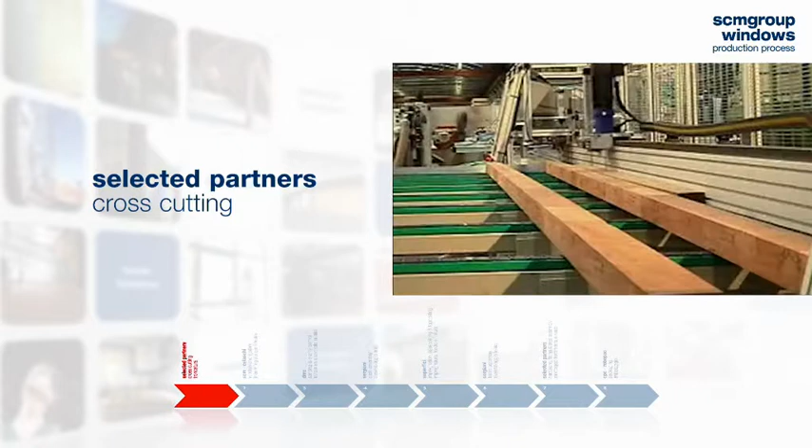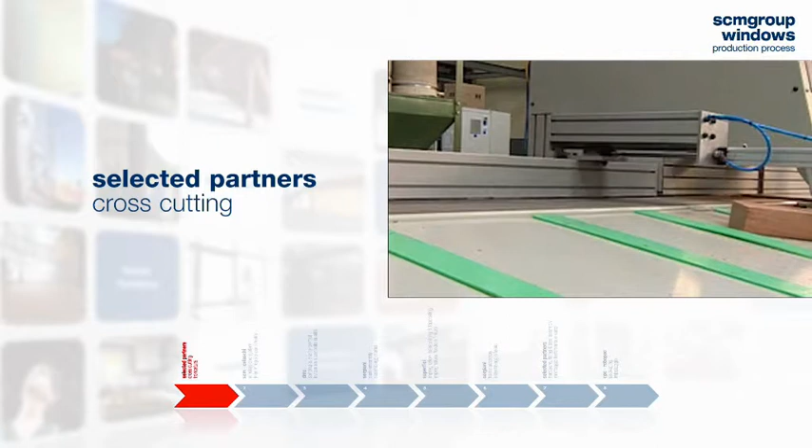Cross-cutting produces parts cut to the required lengths for sashes and frames. For solid wood, bar cutting may involve defect removal, and the cut is carried out according to a production list or with optimization of the bar to be cut. Cross-cutting is performed using selected partner technologies.

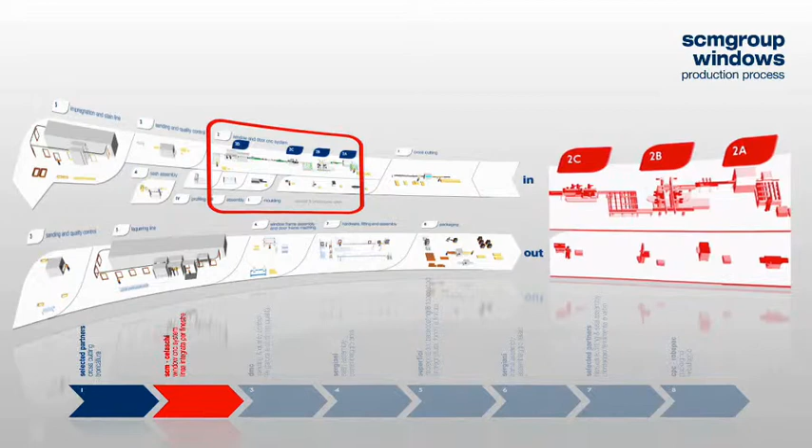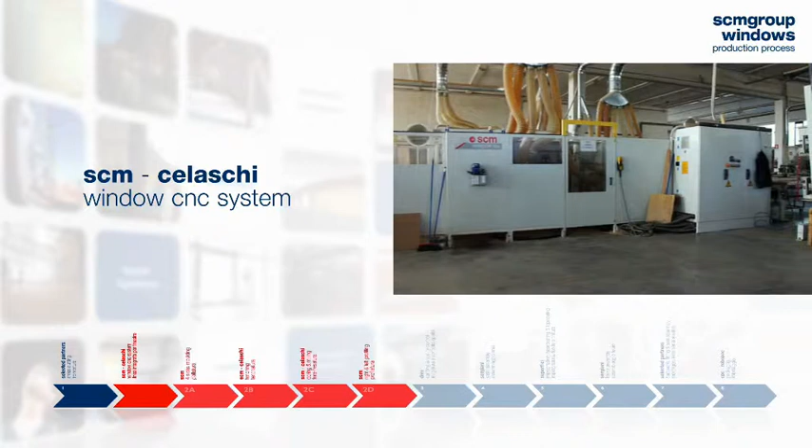All of the mechanical operations required to obtain the finished item are carried out using different types of window CNC systems, to satisfy all customers' production requirements.

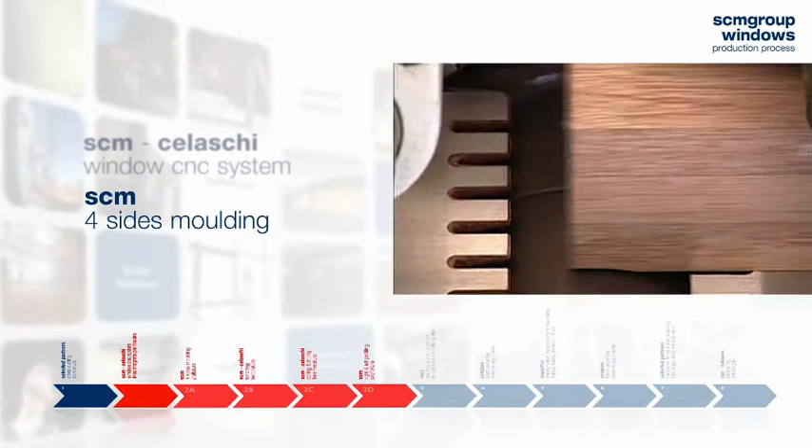During 4 sides molding, the geometry and quality of the parts are prepared for the subsequent processing. If necessary, glazing beads can be obtained when assembling glass on windows, or small profiles for other uses.

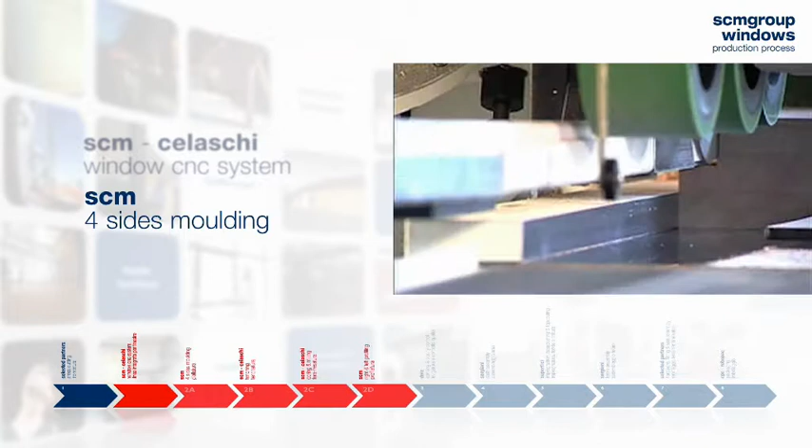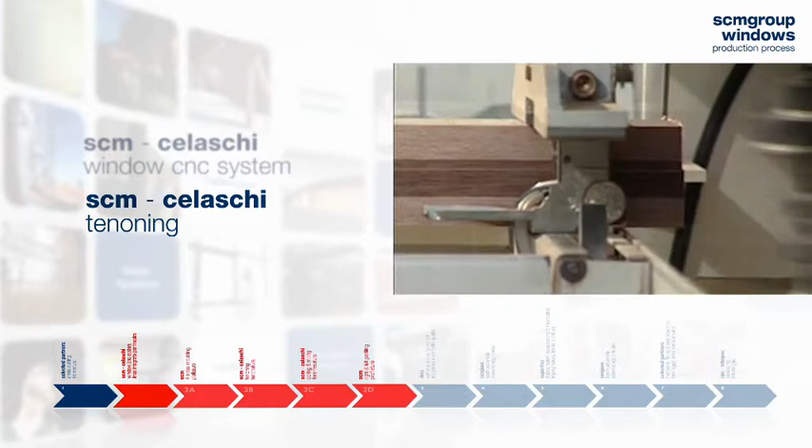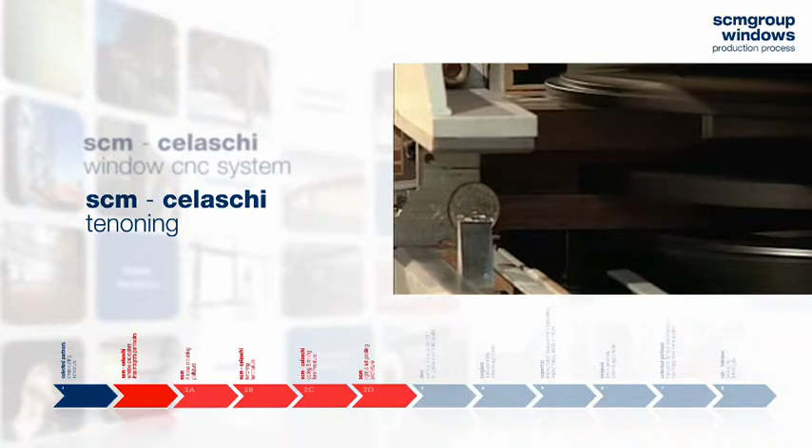During tenoning, the machine prepares the ends of the workpieces for joining or assembly in order to form a sash or a frame. The most common assembly systems are tenons, wooden dowels and mechanical joints.

During boring and milling, the machine heads make the cavities for fitting hardware, hinges and handles on the frame and the sash.

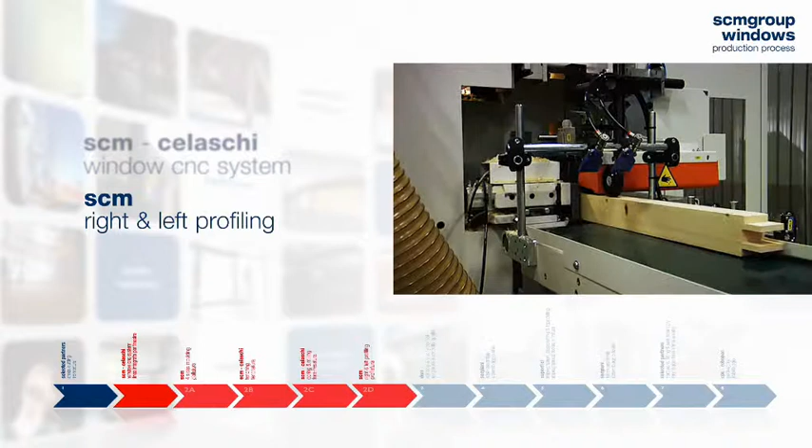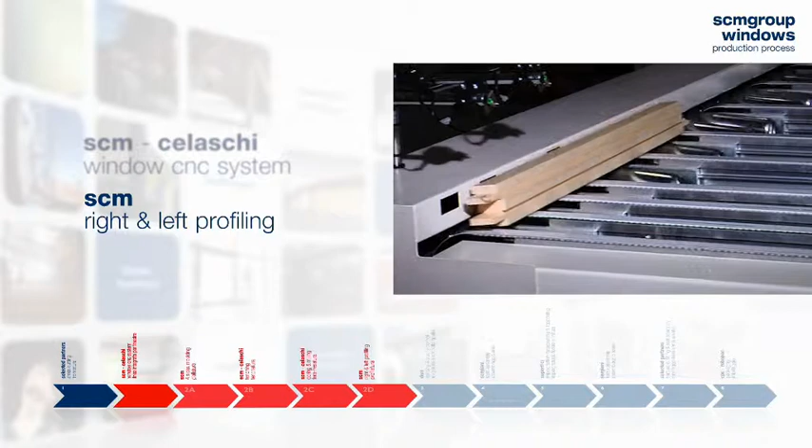During profiling, the longitudinal left and right sides are molded and, if necessary, grooves for seals or hardware are automatically made. All of the technologies for these 4 functions are designed and built by SCM and Celaschi.

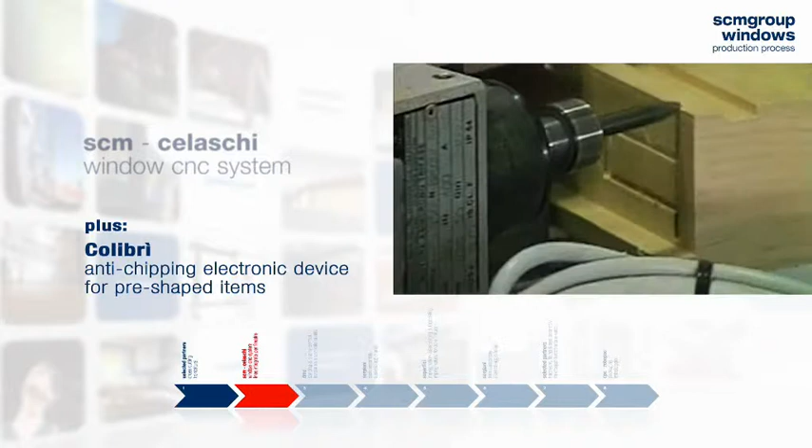The functions performed by the line are managed and coordinated by the line supervisor. Colibri is an anti-chipping electronic device for pre-shaped items. Items can be marked by ink or laser.

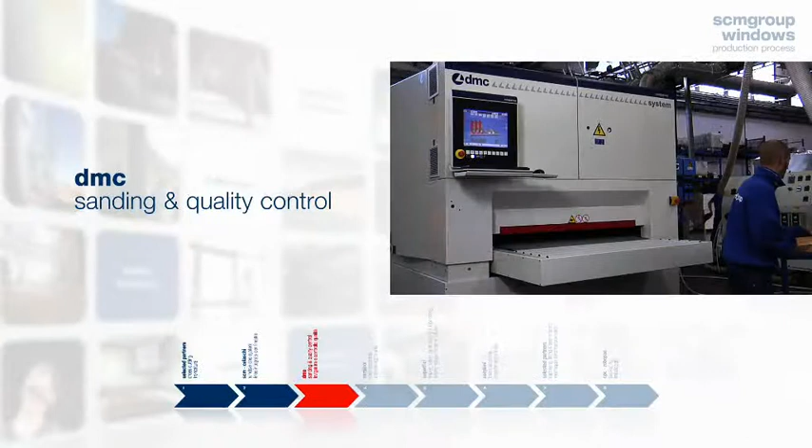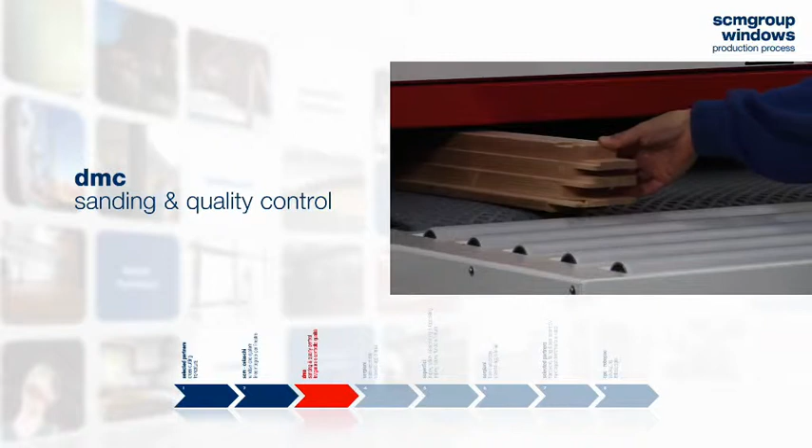Sanding prepares the sash and frame for the subsequent impregnation and coating, to improve the quality of the product by removing any defects caused by the previous processing, and above all to ensure that the coating agents penetrate best and deepest on sanded surfaces.

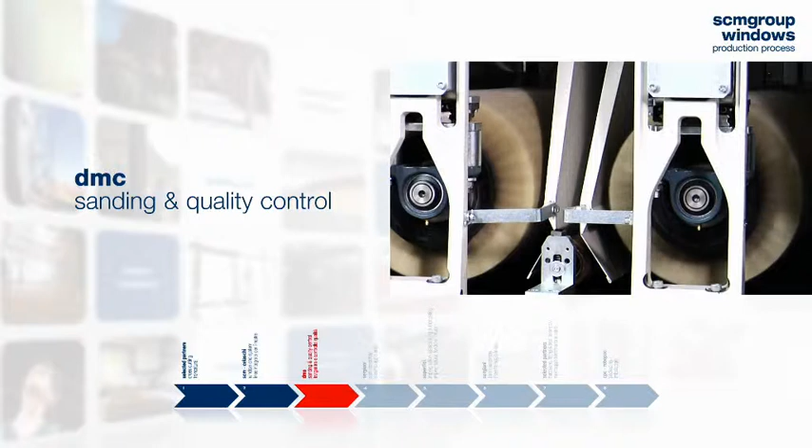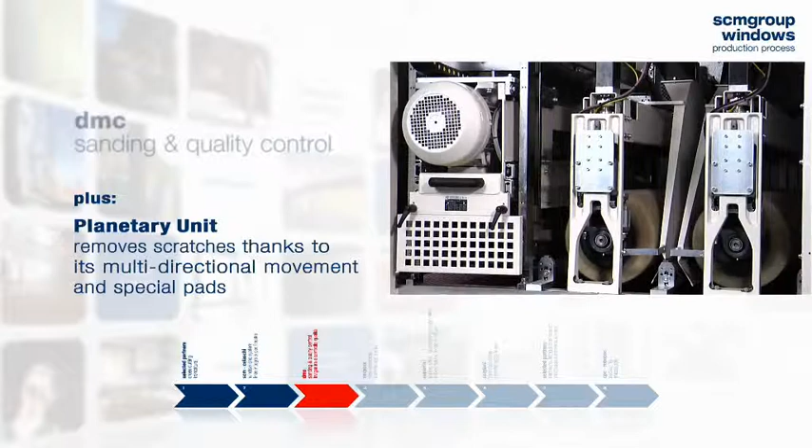The use of a planetary unit allows complete removal of the skin for excellent results. A second sanding step is carried out after impregnation of the sash and frame elements. Sanding is carried out using DMC technologies. The planetary unit removes scratches thanks to its multi-directional movement and special pads.

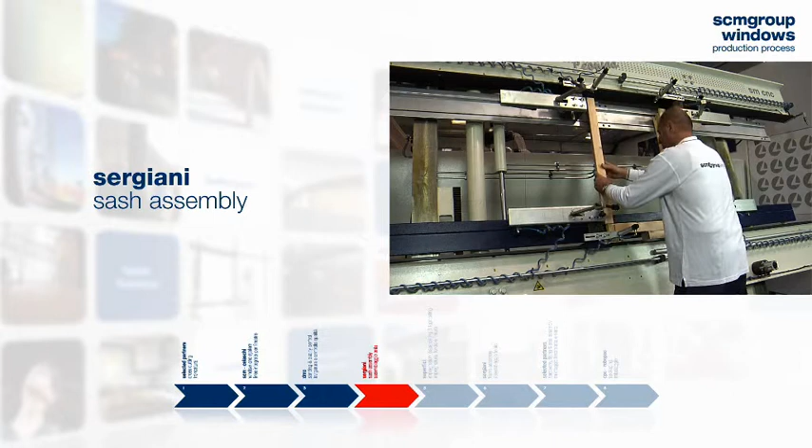During sash assembly, the CNC machine allows, after glue has been spread on the tenons, mass or batch-1 production. Assembly is carried out using Sergiani clamps.

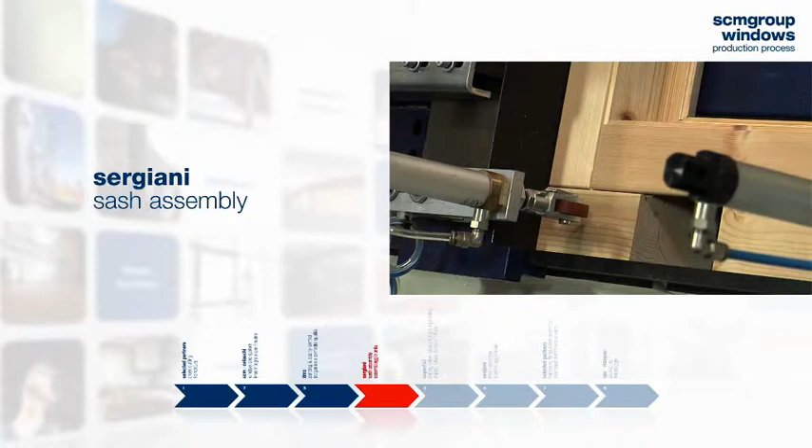Impregnation, base coating and top coating are designed to meet any production requirements. Plants are available for painting assembled sashes, disassembled and hung vertically, or disassembled and rested on flat conveyors. Paint drying is possible using hot air, infrared, ultraviolet or microwave drying ovens.

Painting is also carried out in several steps, one after another, alternated with sanding. Painting is performed using Superfici technology.

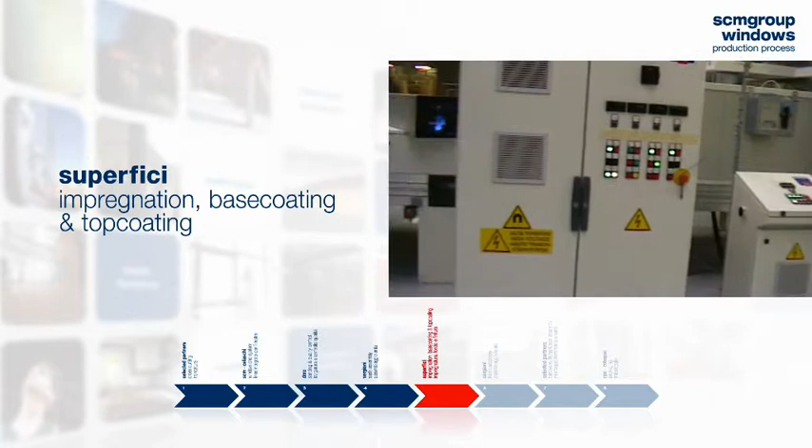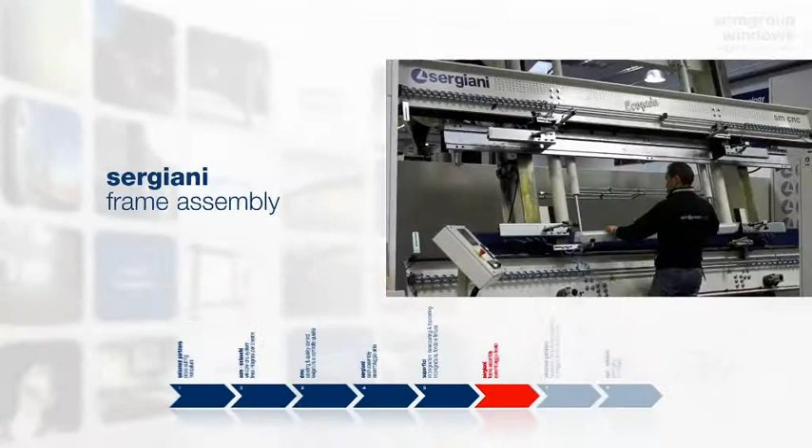With assembly of the frame, as for the sash, the CNC machine allows, after glue has been spread on the tenons, mass or batch-1 production. Assembly is carried out using Sergiani clamps.

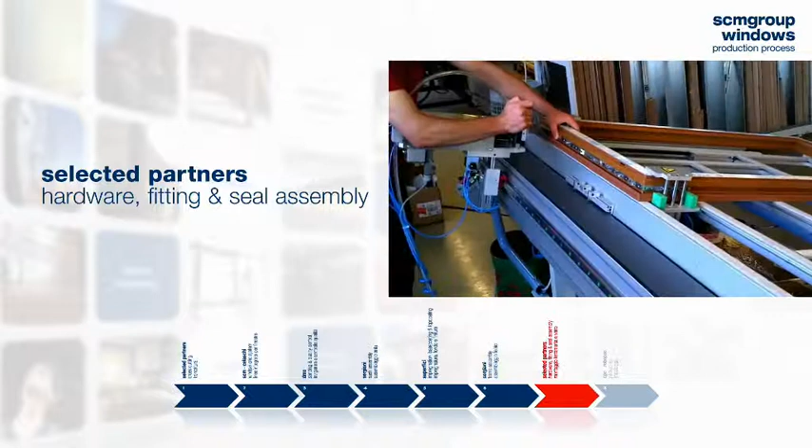Manual window assembly sees the frame and sash put together along with the hardware, fitting and seal. Manual window assembly is carried out using the technologies of selected partners.

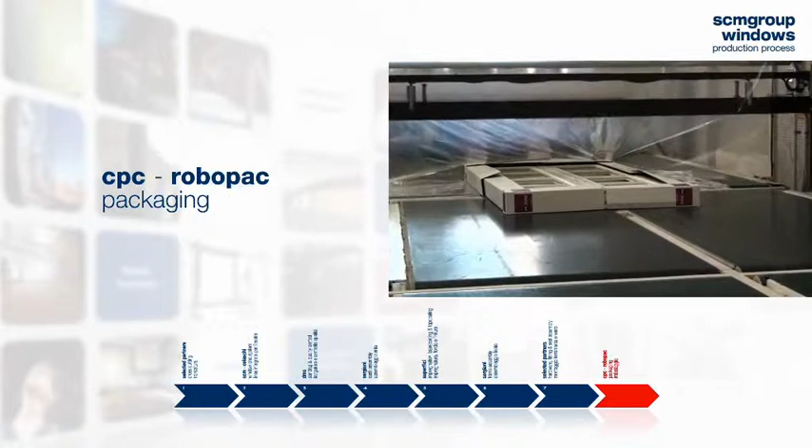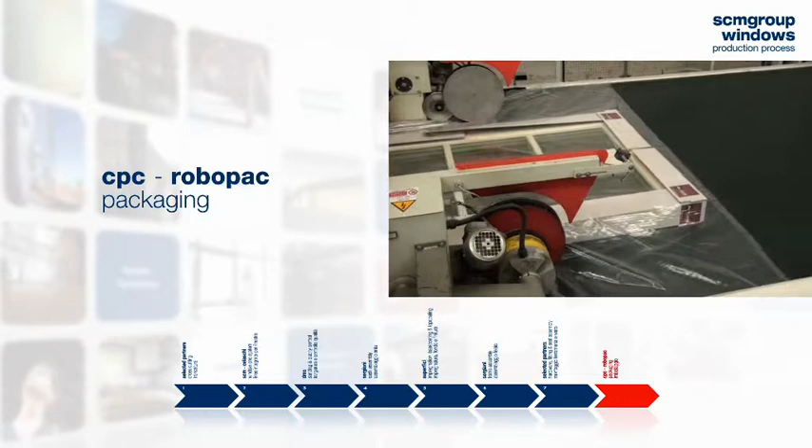For packaging, several layers of stretch film are applied on the sash and frame. For automatic packaging, the machine must be connected to a complete line and the pallet arrives directly from a conveyor, while for semi-automatic packaging, the machine is standalone. Packaging is carried out using the technologies of CPC and selected partner Robopac.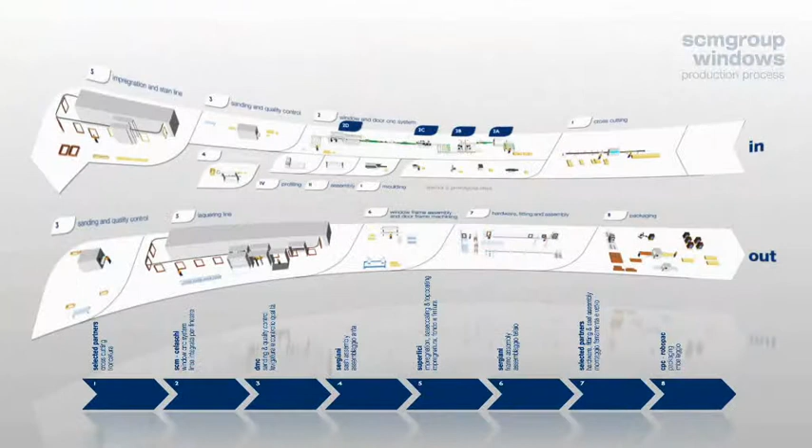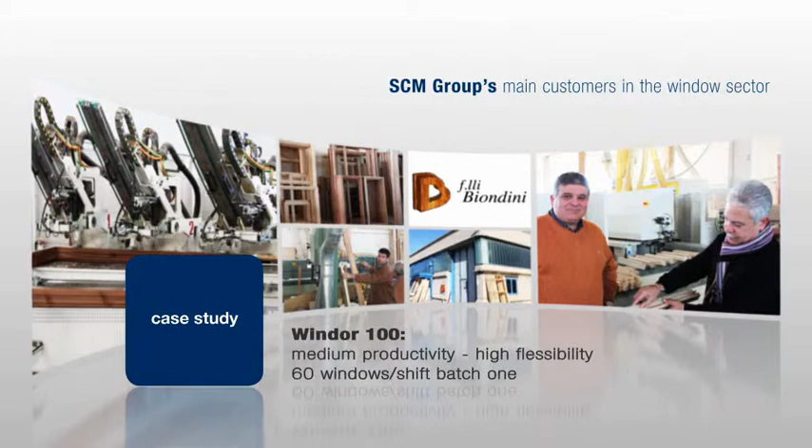Examples of recently produced window production plants include Fratelli Biondini joinery, with the Windor 100 integrated line, ideal for medium productivity and high flexibility, producing up to 60 complete windows per shift in batch 1.

Some of SCM Group's main customers in the window sector.